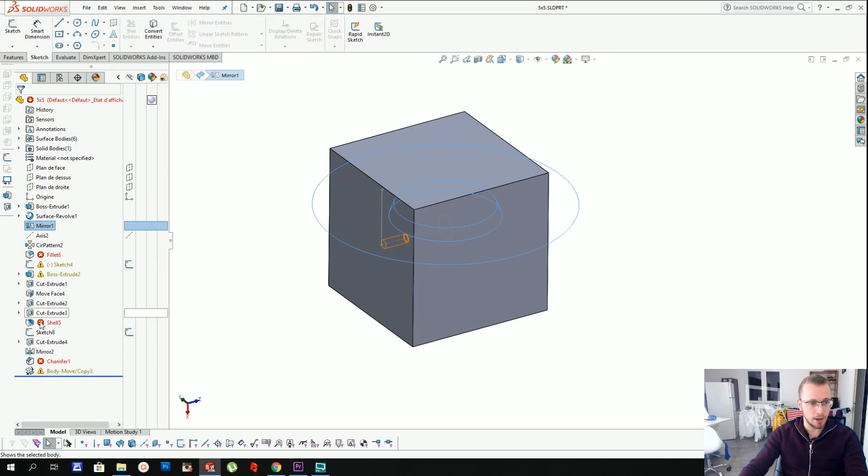Alright, so let's remove all those functions right there. I just need to keep the surface revolve function because that is how I split my solid. You'll notice that here I've got these two surfaces to cut the 3x3 that I showed in the previous video. I'm going to remove one of those, and I won't be needing the rest of the functions. I will keep the axis though, because I use that one to multiply the faces around the cube, and I'm going to do that on the 5x5 as well.

So let's go inside the sketch of the 3x3. Now you'll notice something. Here is a basic 3x3 design. Now, in order to make a 5x5 design, I'm going to need to use VMech, just to make it more stable. Plus, it's a good thing because I'm going to show you how VMech works. So on a 3x3, you get this hook towards the inside. On a 3x3 with a V mechanism, you'll notice how there's first a hook towards the outside of the center, and then it hooks back inwards.

So essentially, I'm going to need to add another circle around it, which is also for construction, by the way. I didn't say that in the previous video, but if you want an entity to not be used like this one in the surface revolve, you're going to need to make it for construction. So yeah, for some reason I can't drag this. Oh yeah, I fixed it. I put a fixing relation, so that means that I couldn't move it.

Now, what I do generally is put 2 millimeters between two circles. You can use the smart dimension to click on both circles, and then give it 2 millimeters between two shells or two layers of mechanism. The diameter of 44 right here, we're not going to be using that anymore. Instead, we're going to make another circle that's tangent to the face right there. So by clicking on the line and the circle, we're going to add a tangent relation, and that way my circle is fully defined. When something is fully defined, it's going to be black.

So again, for construction, and now I'm going to put a 2 millimeter distance between the top of the puzzle and the second layer of mechanism, I guess. Now, this little line here that's linking our mechanism to the outside, we're going to remove it because it's more of a constraint right now.

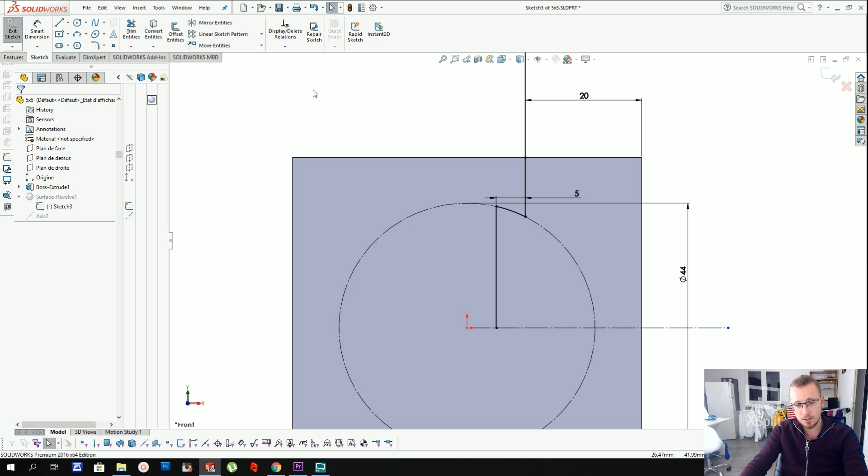And first, we're going to use this edge length, 60. Now we need to do 60 divided by 5, because it's a 5x5, times 2, because you put 2 layers here. And now we're going to go towards the inside, but we're going to stop here, and we're going to do a VMech. That means I'm going to put a hook towards the outside, not the inside this time. So again, using the arc, just like my previous video.

And then I'm going to link the outside to the inside, and I'm going to make that line go through the origin. So here I click on the line, click on the origin, and press coincident. That's just so I have a conical mech.

It could be anything, it could be vertical, it doesn't change much, but when you make it go through the origin, you have approximately the same thickness on the outside as on the inside. So for example, a corner stalk isn't going to be smaller towards the outside and huge near the mechanism, or the opposite. It's just going to be a straight stalk that goes straight towards the inside, and it's going to be of a relatively constant thickness, which is what we're looking for.

So for the V mechanism, again, we're going to use about 3 to 5 millimeters. I'm going to put 4. Last time I put 3, but this is a 5x5, so I want a little bit more mechanism just to make sure the parts are really stable in there.

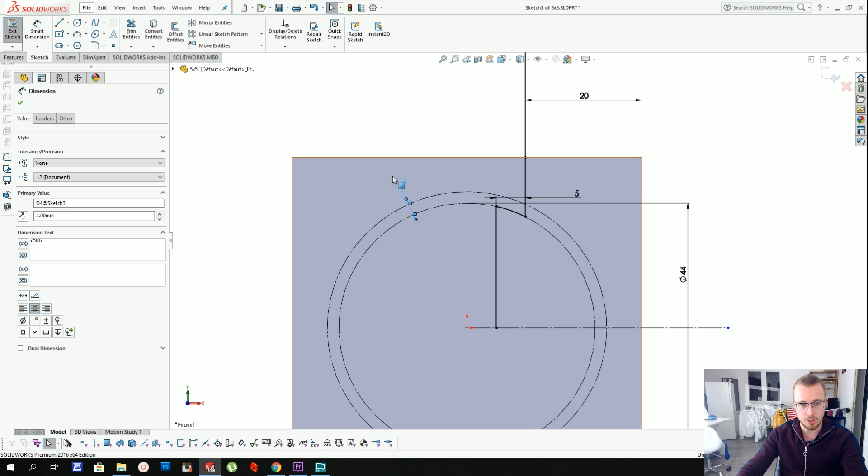And then I'm going to add a dimension here, and let's say I'm going to put it at 3 millimeters, which leaves us with about 4.5 millimeters for the screw, and that's just the radius of the screw because it's going to be symmetrical. So essentially you still have 9 millimeters to fit the screw, which is great because an M3 screw, even the head, goes through that shaft. So that's perfect. So we're going to leave it at that.

This is the first portion. This is the first layer, like the 3x3 layer. This is the layer that's closest to the center. So technically this is like a 3x3 that is completely disproportional because you're going to have a thin layer and 2 larger outer layers. Let me just show you what I mean by that. Mirror and mirror that body. Okay, so here's your 3x3 with a small inner layer. Now let's go back in the sketch.

Something that is interesting. Now here, putting a line that goes all the way to the axis isn't necessary in the sense that it creates big parts. I'm going to keep it now and show you later why it's not necessary. But okay, now we need to add the 5x5 layer. So we need to add an extra layer. Now that is very simple. It's much simpler than you think, for those who don't know how to design puzzles.

Now we're going to do 60 divided by 5 because that is the width of a layer. And then we're going to go inwards towards the inside of the puzzle. Now there's something that's just a nice tip for you guys to have on a 3x3. If I put the mechanism further than this line, then the edges would be cut off because you're essentially cutting through the center of the edge.

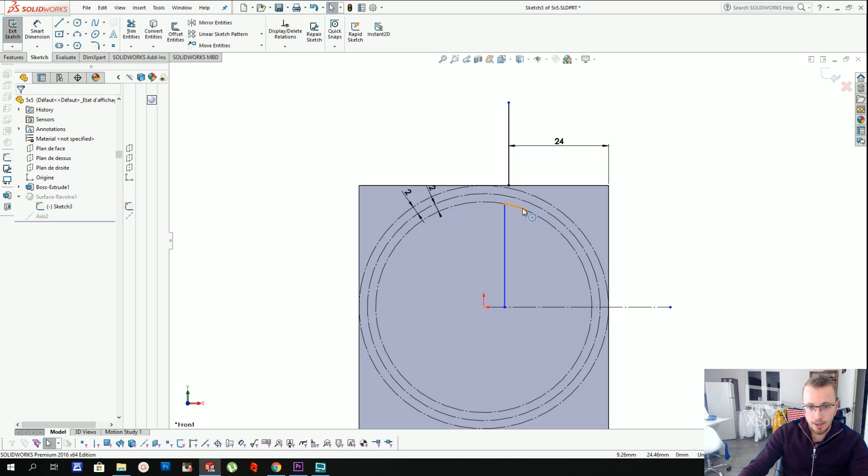This line goes straight through the edge, and if I had one cutting plane going all the way down here, well, the symmetrical cutting plane, the one here on that side, is going to cut the edge off of the puzzle, which is not what we're looking for. Let me just show you here. If I do a mirror of that surface, here you see that the edge is cut off.

Now, if I don't go all the way here and do a symmetry again around this line, then as you can see, the edge will have the mechanism portion right there. If I go all the way here, it's going to cut the edge off. Now the thing is, with a corner, it's even stricter.

Here, in theory, you have an angle of 90 minus... So okay, 90 minus 54.7356 103.17246. I know that one by heart because I always design puzzles. I just have to recite it in my head in French. So it's about 35.26, and you need to make sure.

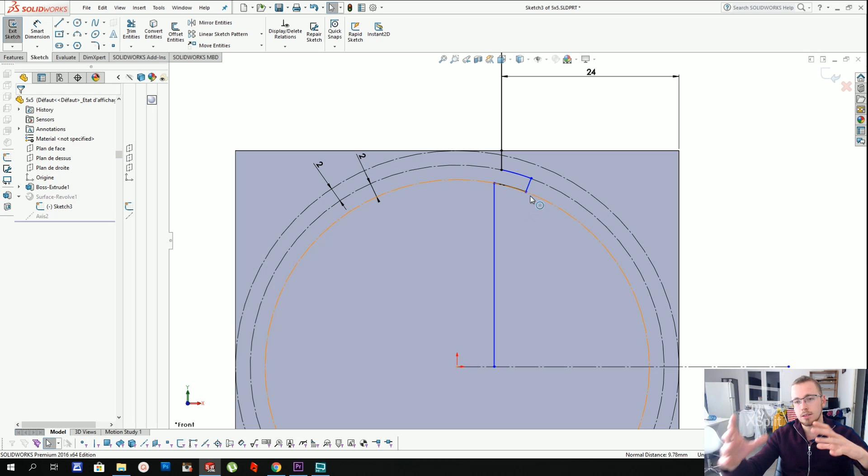Actually, I think I made a mistake. It wasn't 90 minus 54, etc. It was actually just 54, etc. So 54.73... 366. Oh, I put one extra number. It doesn't matter. So this is the angle you're looking for, 54.74. And you need to make sure that this line does not cross this line. Otherwise, the corner is going to be cut off.

So let's bring it towards the center. Notice how when I make a line and click on that point and then go here, it's going to automatically show me a dotted yellow line. Well, that line makes it so that your line right here goes already through the center, so it's already pre-constrained. There's already that relation between the line and the part that I usually do myself.

Now, once that is done, we're actually not going to make this point here fuse to that circle, because that means that we're not going to be able to fit the mechanism in. We're going to need to create a new layer of mechanism underneath the VMech. Again, 2 millimeters between the two circles is just fine.

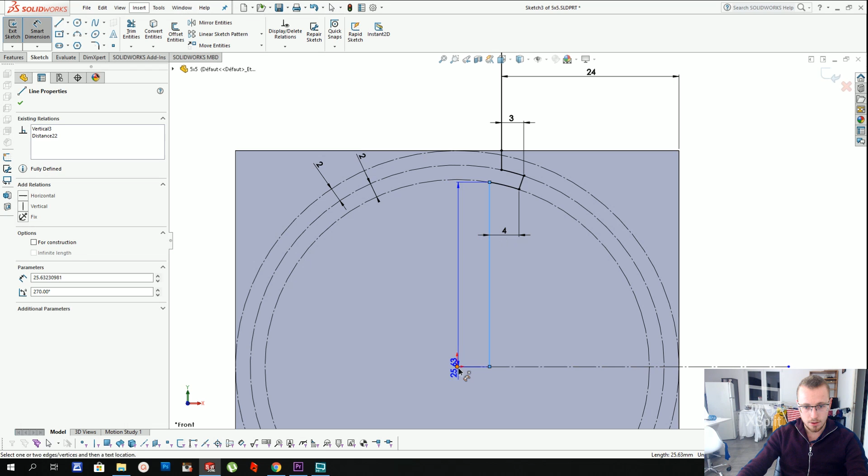I'm a bit faster than my computer right now. It's having trouble following, even though I have like a GTX 1070. I don't even know why. Anyways, so let me just think. Okay, yeah.

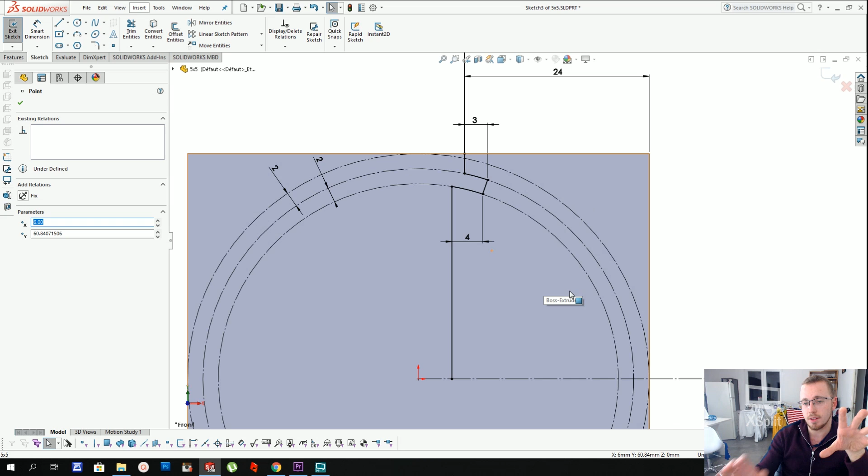So what I'm going to do is I'm going to reduce the size of this segment to 1 millimeter, and here I'm not going to make this line go through the center. Instead, I'm going to make it go a little bit like that. That way the corner stalk, which is the space between this line and this line, is slightly thicker. So now that's done, I can just create a mechanism, so just an arc, which is going to link that line to this line.

And dimension that, let's say I want a corner stalk thickness of 4 millimeters, so I just put like 2, and 2 will be fine. This is essentially half of the corner stalk. Well, it's not exactly half. Let's just put 2.5, because it's like a triangle, and the 2.5 you're seeing is the distance between the center of the corner stalk and the cutting plane. So technically this is going to be a thickness of about, I don't know, like 4 millimeters or something. That's approximate. And now this line, by the way, I'm not going to use that one. It's for construction as well.

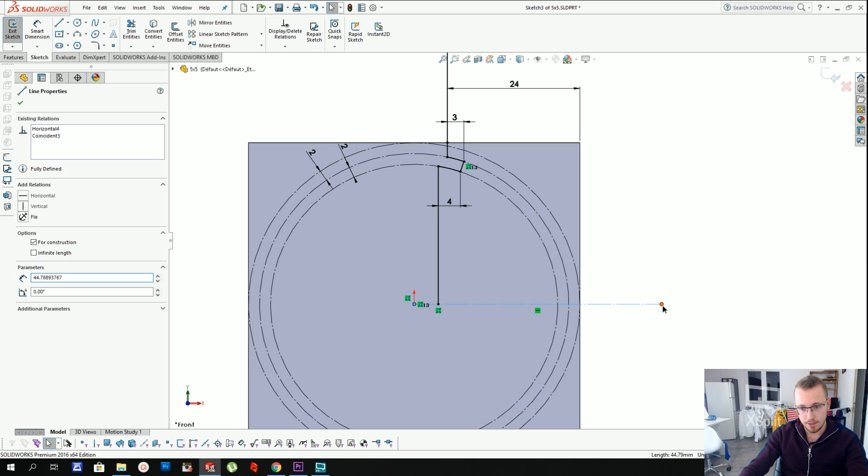So here you've created another line. So here you've got your 3x3 going all the way here, and here you've got an extra cut going all the way here. And now if you notice, this little part that you see here is going to be an inner layer of the 5x5, and you see the hook that goes inwards, and for the outer layer you have another hook going inwards, and that's going to be like your 3x3 section, so the outer layer of the 5x5.

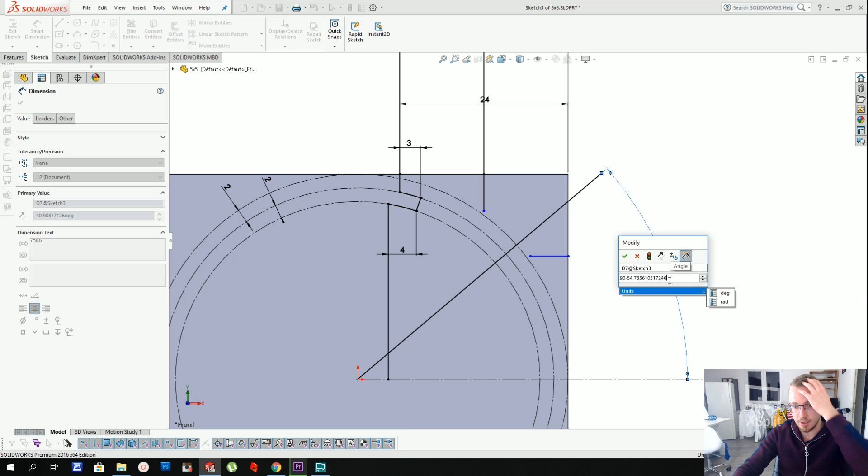So now if we revolve this around this axis, you'll notice I have these two surfaces. I'm going to make the body transparent, just like in the last video, and you see this is my cutting plane. You see the two surfaces are obviously revolutions, because we want the puzzle to turn. Now we're going to mirror those, so I still have my mirror function from before. I'm going to mirror both surfaces, and now I've got this.

And once that's done, I'm going to use the axis from the last video, and I'm going to create a circular pattern of all those cutting planes, and I'm going to copy them threefold around the axis. And there we go. Now that that's done, you'll notice I've got my 5x5 mechanism, and just the thing I was talking about, the corner stalk, you can see here, like if you can reach the inside of the puzzle, that means your corner is still in place.

Now, the thing is, I explained earlier that the closer you get to that line, the smaller the corner stalk is, because if you go further than that line, you're essentially cutting it off. I'm going to show you, if I get really close to that line, you'll notice how my corner stalk is going to be extremely thin. This is the space for the corner stalk. So that's why I was saying that. So you need to make sure you've got a little bit of leeway there.

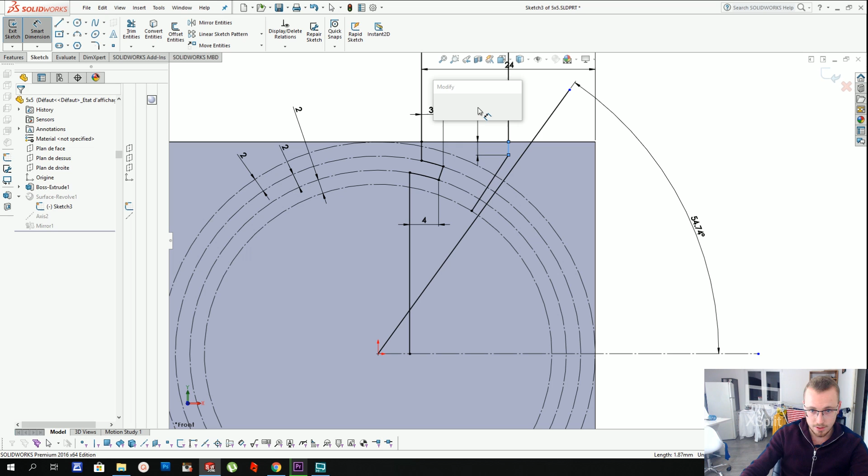So yeah, again, at least, I guess, like 2 millimeters is fine. It would be enough. So make sure between the axis and the point you've got 2 millimeters. On some puzzles, I tend to go down all the way to 1. That's when there are a lot of parts and the puzzle is complex. I'll probably need to do that in one of my future videos, but for now I'm going to stick to simple stuff.

So now, it looks complicated from here, but don't worry, it's not that complicated once you understand the 2D aspects of how a puzzle works. So essentially the cut view of the surface. So if I do like a section view, you're gonna see my solid right there, and this is how you're gonna cut it. I can't let my click go because otherwise you're not going to see the lines,

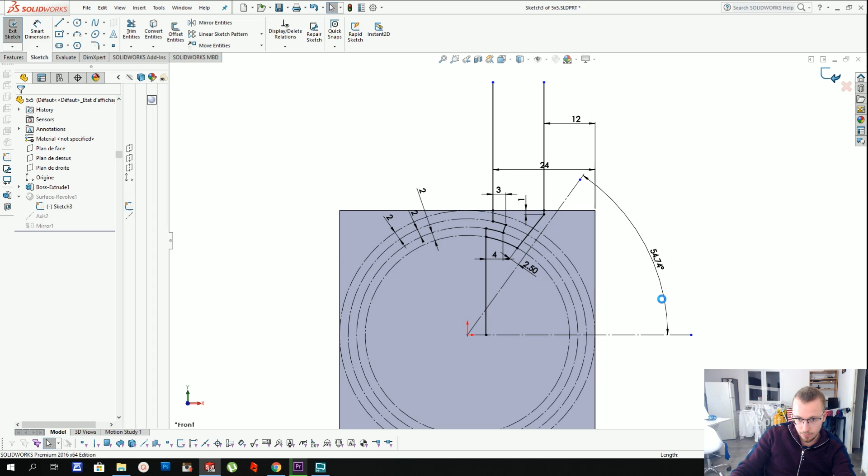but here you've got the VMAC right where my cursor is, and here you've got the first layer, and here you got the outer layer, and you can recognize the mechanism. This is like a VMAC edge right there, and you can recognize it if you've already opened a 5x5. You'll see that this is how it works. So it's actually quite easy. You just have to add one layer right there, as I showed in the sketch.

So now we're going to cut it open. That's the fun part. So I'm going to split this solid with all the surfaces I've created, like that. And now I'm going to press cut bodies. Now I've got a tiny software that was created by a member of the Twisty Puzzles forum, and it's somewhere in there. It's called SW Checkbox Helper. So I'm going to use that. It basically checks all the boxes for me.

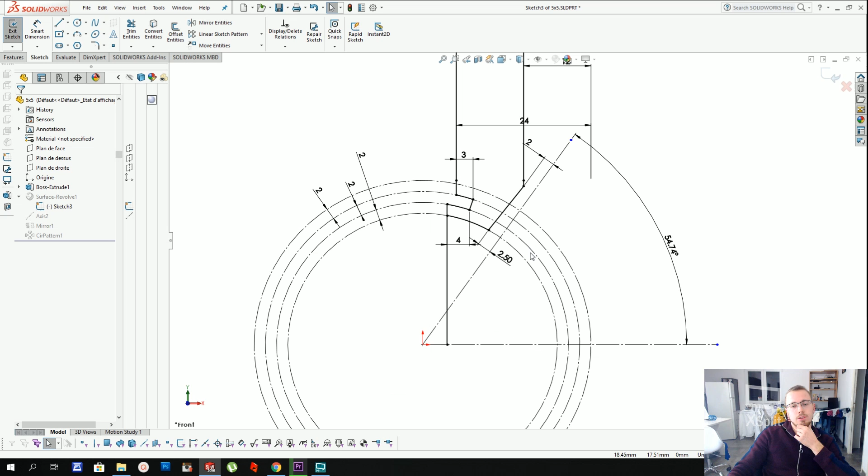Right now I have 99 boxes. That's the number of parts in a 5x5. So I'm going to press 99 and click go. So it's going to check all my boxes for me, and oh, that is such a relief. I hate clicking on those boxes. Once when I started Twisty Puzzle Design, I had to click on 1,670 boxes by hand, just by myself. So that was a pretty long process, and I am so glad that somebody created SW Checkbox Helper.

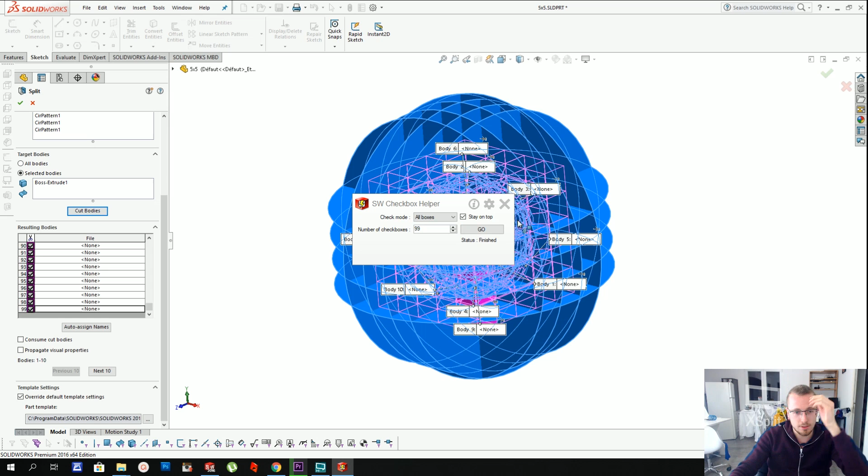Anyways, same as before, we're going to isolate all the unique pieces. Now you'll notice that on the 5x5 there are, okay, no, it would be more on 7x7, but if a piece is symmetrical, let's say imagine this one and this one were two different unique pieces that were symmetrical, well, you would only need one of them, because then you can do a symmetry using the mirror function. So we're going to keep one of each unique piece, like that.

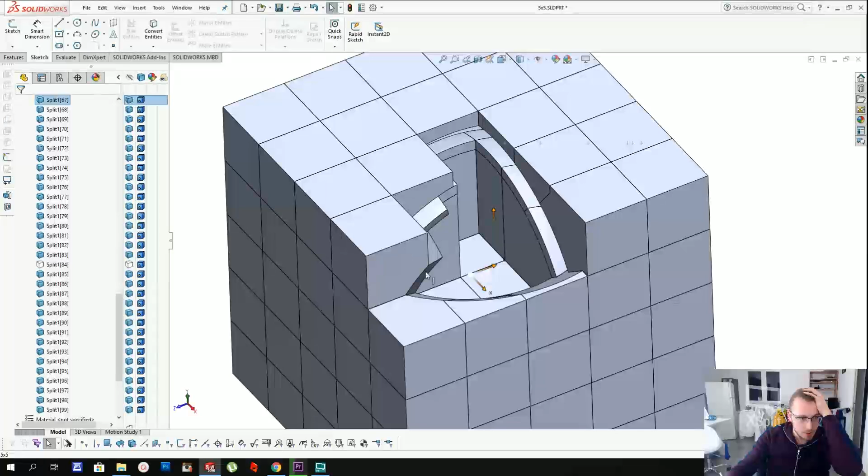And as you can see, we've got the same problem as yesterday, where the centers are so long, and they don't need to be that long, and we need space for the core. You see, this center stalk is extremely long. Now this is where I was saying you could improve on the design. So here, instead of going all the way down to the center with that line, what we're going to do is go all the way to another circle, which is also going to be 2 millimeters apart from the previous circle.

And all right, let me just do that, because I'm speaking faster than I can design because my computer is slow. I think it's slow because I'm exporting the video right now, but yeah, I guess I can still explain anyways.

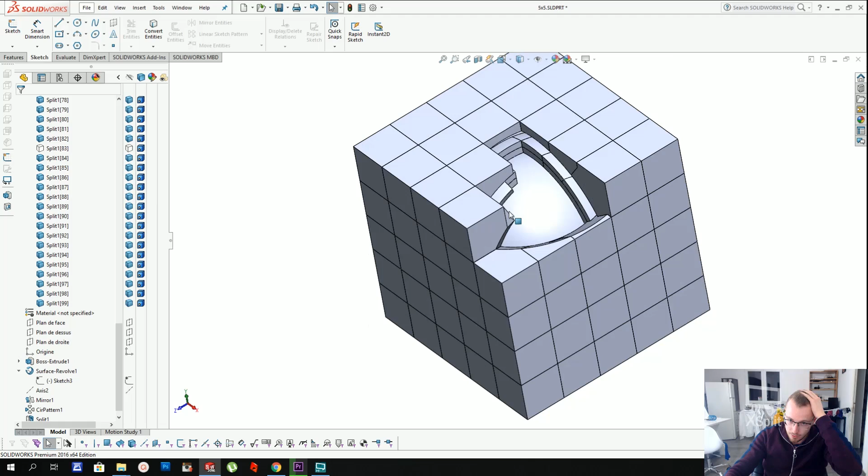And now that I've created this line, again, previously it was all the way down to the axis, so we need to link it to the axis, but we can do this through that circle right there by creating a new arc. So right now what we're doing is essentially making a spherical core. And I'm going to show you that right now. I'm not sure the split function is going to follow. Normally it should. Yep.

So now your centers look like this. It's as if they were positioned on a ball core. This is what your center looks like. It's like a section of a ball. Well, the opposite of a ball. It's just like concave. And here is your spherical core. And that's what it looks like. So it's actually a very nice method.

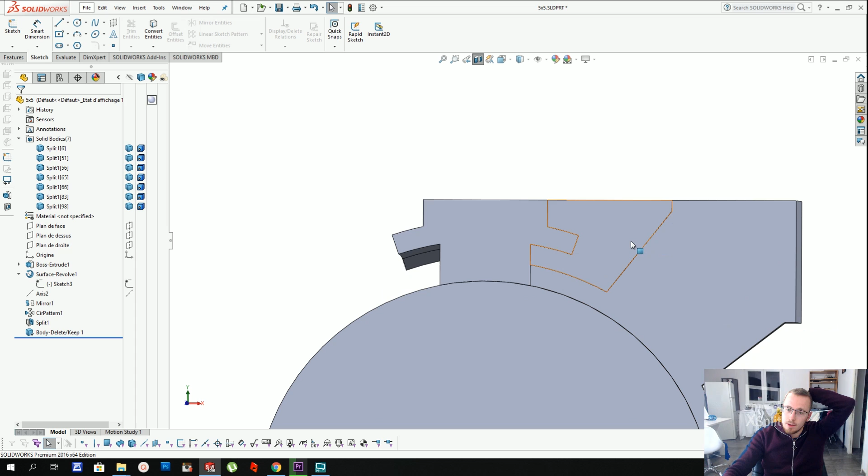For some reason, this center is fused to the core, which means that my split function had a small bug. So I'm going to fix that one real quick. That means I just need to check a few boxes that were unchecked by the failure of the part recognition in the split function by SolidWorks. So let's go down there and see which one.

Oh, there it is. Number 86. And number 97. So there were only a few problems, just a small bug. So that happens. And in this case, we're also going to hide the core. And now I've hidden all the unique pieces.

So now I'm going to select them in my tree, like that. And I'm going to press delete. And now I can delete or keep bodies. I'm going to press keep bodies. And I'm going to delete them. Delete the rest. And now if I show all the bodies,

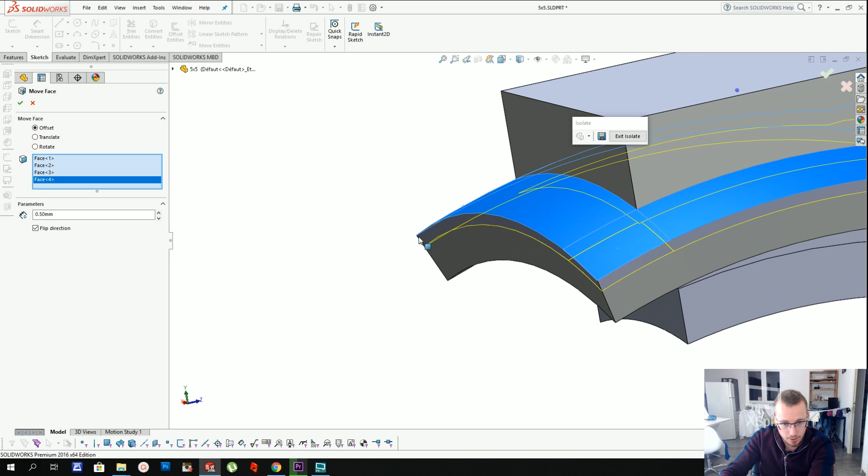you can see that the only bodies left are my center, my 3x3 edge, 3x3 corner, the wing piece between the edge and the corner, the central corner, and the central edge. So this is all you have in a 5x5. Now we're gonna hide the parts that don't need tolerancing. Well, I'm gonna undo that.

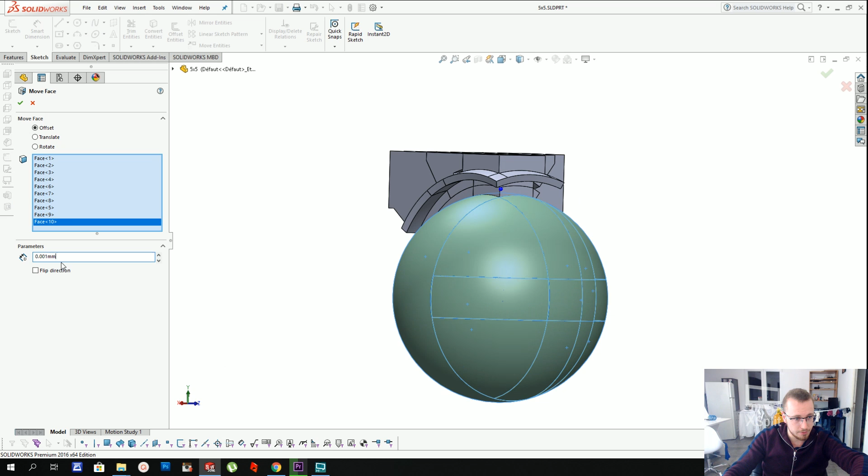The only parts that need tolerancing are the parts where you have an interface here that would be squeezed between two sides of the same part. So here, for example, the blue lines that I just highlighted, this one and this one, these are essentially this part of the center that's being squished by this piece, and you need to avoid that at all costs.

Now, what's important is that this surface here is the one that keeps that part in place. And this surface doesn't really need to be in contact because this part is held in by the surface underneath. So you actually need to put a 0.5 millimeter tolerance on the top of V mechanisms.

I always use 0.5. Technically, you could use any number between 0 and 2 because it's 2 millimeters thick. You can't go higher than 2. But you can essentially put as much tolerance as you want. It just needs to be enough for it to be smooth. But since you don't need contact, it could be like a 3 millimeter tolerance if it was a big design.

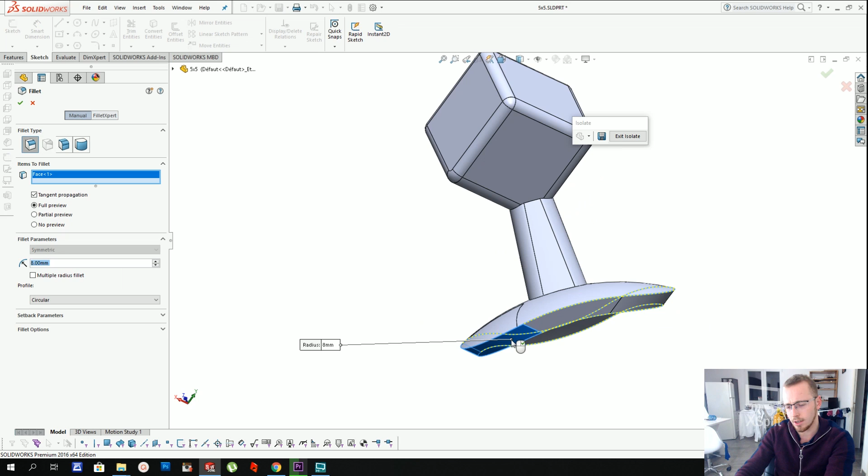But anyways, on the 33 by 33, for example, I happen to use over 2 millimeters of tolerances on one of the VMechs, the one at the bottom, the 3 by 3 VMech. So it's a lot, and it was just enough. So on any puzzle like this one, you could use 0.5, and that's more than enough.

So we're going to start with the tolerances by clicking Face Move, and I'm selecting the top face of my VMech, like that. Flip direction, and I'm going to remove 0.5 millimeters. As you can see here, this is the current thickness, and this is the new thickness. Now I'm going to exit the isolate function.

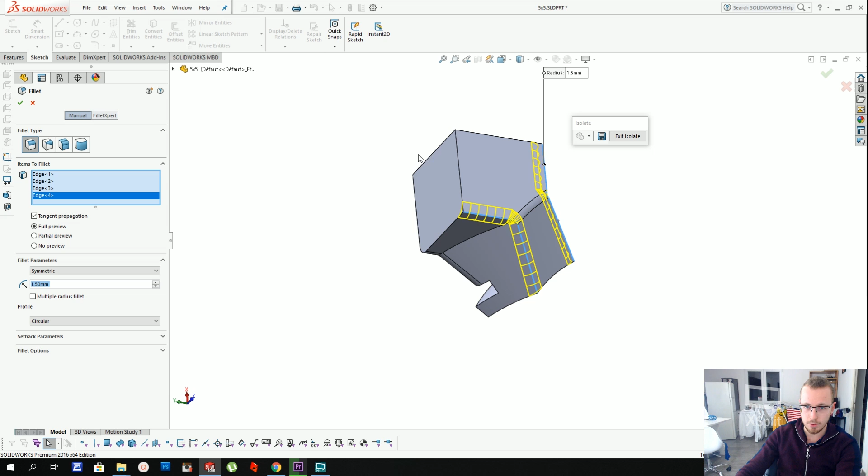Here I've got another part with VMech. You see VMech on the two sides, so I'm going to select the two faces, press face move, and offset those by 0.5 as well. And then I've got this edge here, and I'm going to click the two VMech faces and offset those.

Now, I don't know if you guys remember from the last video, but I said there was a small issue with SolidWorks. If we look at this piece, we have an interface between two edges here, one that's on a bottom surface and one that's on a top surface. SolidWorks has a little bit of trouble recognizing that, so we're going to do a move face, and move that face by almost nothing, 0.001 millimeters.

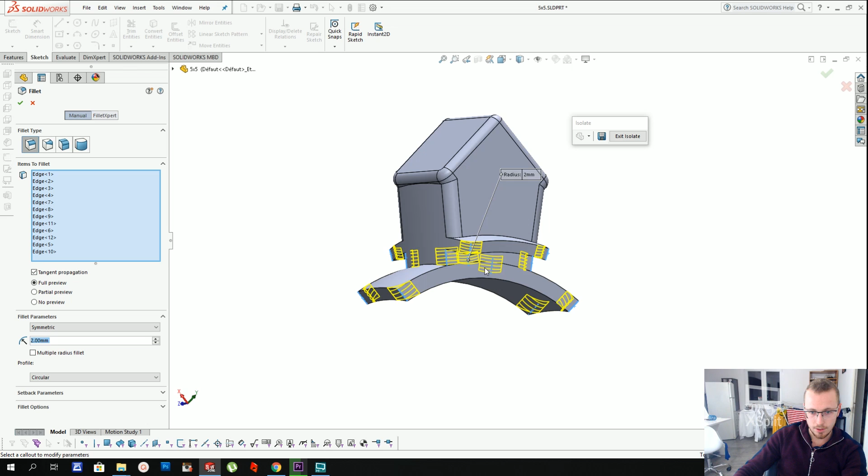Sorry if my voice is shaking. It's really cold down here in my house. I don't know why. I think it's like 18 degrees. And I didn't use my microwavable slippers this time, so yeah, it's getting cold.

Anyways, let's see what's left. Well, I've used the move face on these three parts, so now they're offset. As you can see, here's my tolerance right there. That's where there's no material anymore. And there is one last one that you need to absolutely not forget, and that is the core.

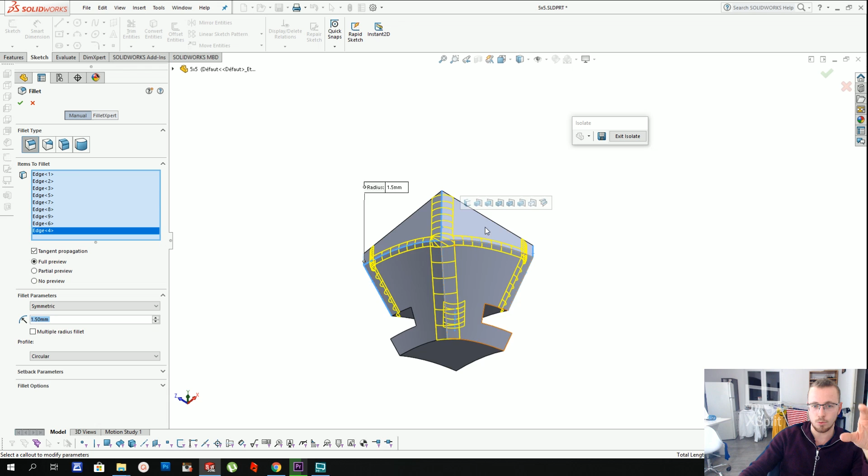Because if the core is like this, those parts won't be adjustable because they'll be stuck between the center and the core, and therefore, if you want to make it tighter, you're just going to squeeze them against the core, which is absolutely critical. So now I'm going to click on all the faces of the core, and do that same tolerancing function, which is the move face function.

And again, I'm going to flip the direction, and now I've got the spherical core that's been pulled back 0.5 on the outside. So now I have a little bit of leeway between the center and the core.

All right, so now I need to do fillets. And well, I've already done that in the previous video. And you know what, I am gonna do that step, but technically once I've done this, you can do the rest yourself.

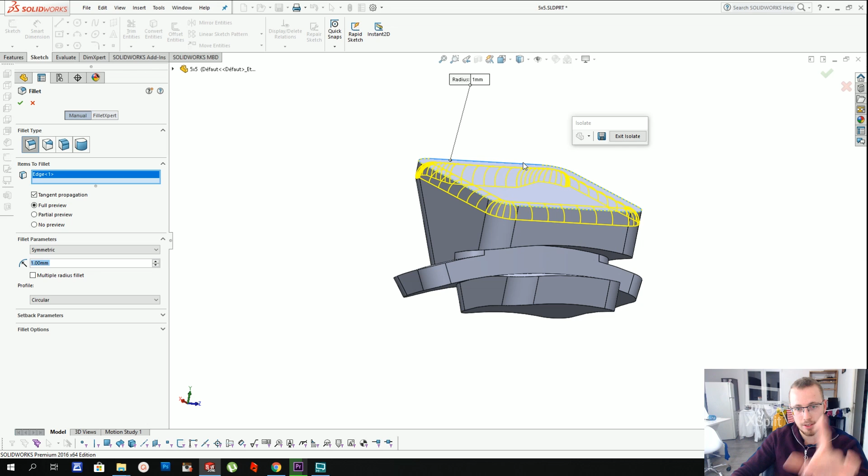Everything that I explained in the previous video is enough to complete this puzzle as is. So technically right now, I'm done with the explanation, because you should know how to do this if you've seen the previous video. If you want to know how to do the rest, watch the previous video.

When it comes to me, I'm gonna try to speed design this 5x5 and end the design just for fun, because you know, why not? So let's. I am gonna talk about what I'm doing though, that way it stays interesting.

So let's do this. I'm gonna fillet those functional edges, but I am gonna increase the fillet size, but not too much, otherwise the corner stock is going to be too thin, so I need to make sure it's not too thin. I've put 1.5 millimeters radius.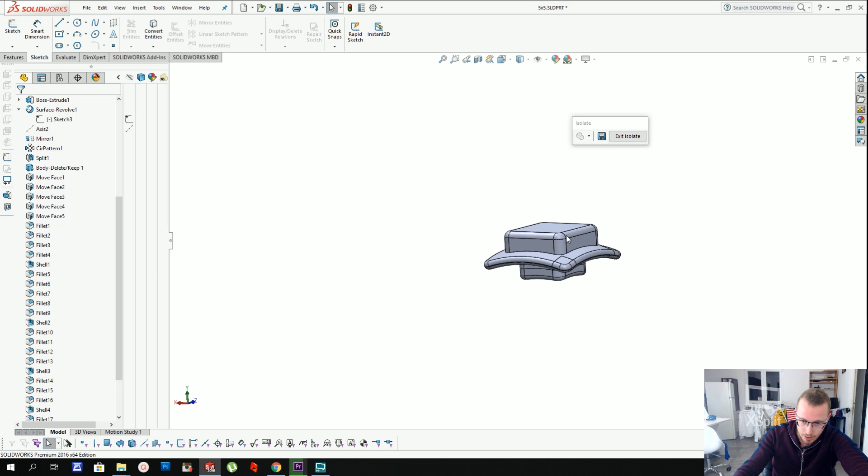Now I'm going to use 1 millimeter on the outside because I think it looks good. And now there is one thing that I can do on this piece that I couldn't do on the other puzzle. I can make huge fillets on the inner 3x3 because the piece itself is gigantic. So I'm going to put 8 millimeter fillets.

That's huge, but it's gonna make better quarter turns, I guess, corner cuts, sorry. And then now I can use 0.7 millimeter fillets for the top and bottom surfaces so that they don't catch with upper layers of the mechanism. And now the corner is done, so I'm gonna hollow that out just like the previous one, at 0.8.

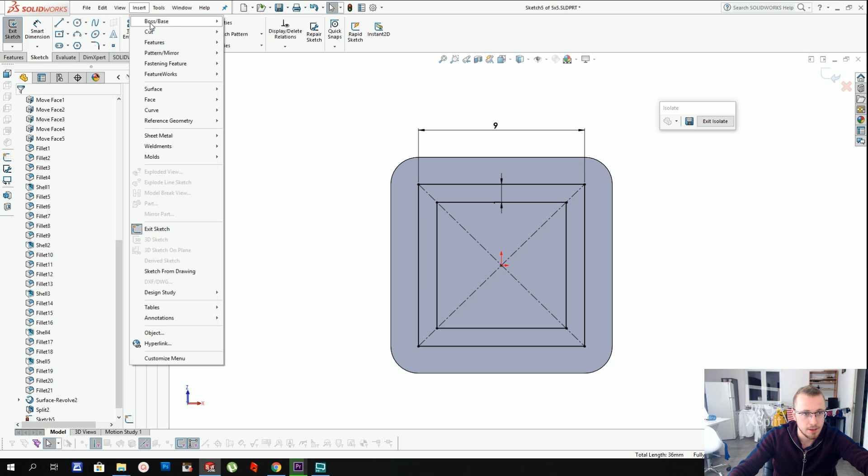All right, now that that's done, I can move on to the next piece. Now, for those who want to know how to make a hole inside the core, for finalizing the core, I'm going to show you that later on.

Do stay tuned for the core design, because the core is very important. There is something that you can do to make sure that there are no stacking problems, because sometimes with part stackers, the core has a little bit of a problem, which is the fact that it's hollow. And when it's hollow, some parts can actually be stacked inside the core without you knowing, and therefore when you receive the puzzle, there are parts that are missing, and that is a big problem. So just don't forget to check out the core design, because that is extremely important.

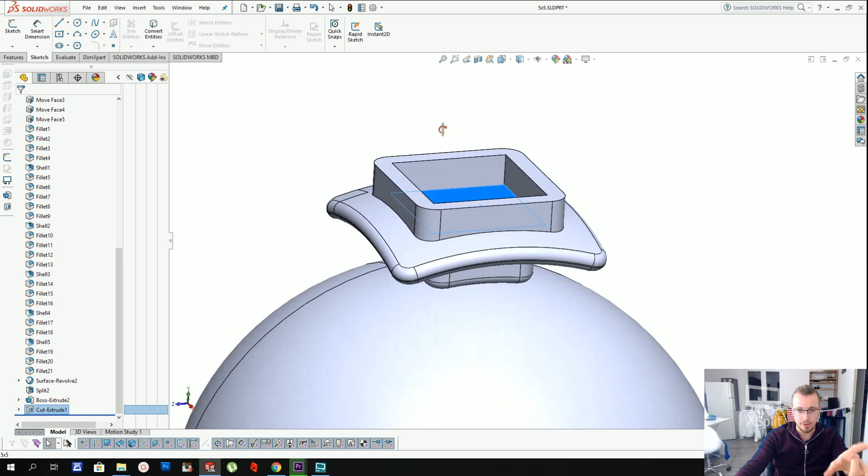All right, I'm going to continue designing that part in the meantime. So right now I'm doing the wing piece between, I don't know why I call it that, but I've always called it that. So no, okay, I clicked on a function that automatically selected certain edges, and that is not what I wanted. It almost selected all the edges of the model.

So yeah, now I've done my 1.5 millimeter fillets. I need to do the outside, the appearance, which is 1 millimeter. And this is what it looks like.

Here I've got my corner cut fillets. These are important because this is where the piece is gonna interact with other pieces of different layers, and I need to make sure this is big enough. 1.5 is enough, it's still gonna be good.

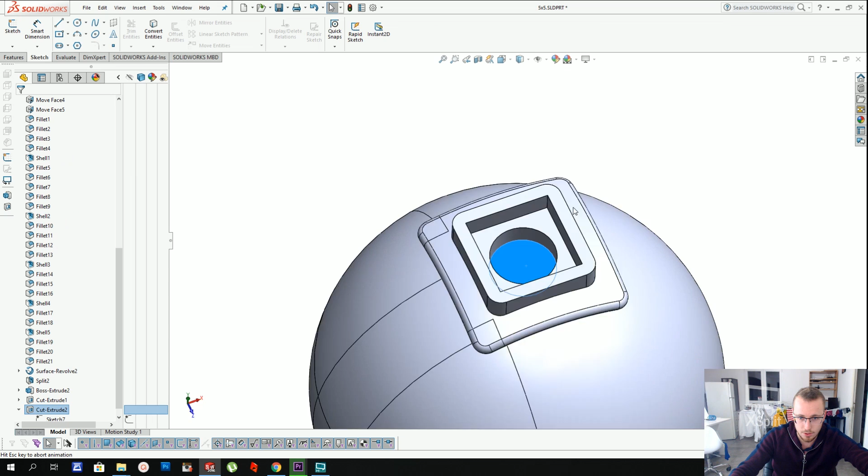I'm actually doing a design that I know I won't print, even though it's not exactly useful right now, but whatever, it's fun to design this with you guys. All right, so let's shell this at 0.8 millimeters. Now it's hollow, and I can quit the isolate function.

Now you'll notice I've done the corner and the wing part. I can do the bigger edge. I am going to show you a small function, an extra function here. It's just a tip. I might have a few tips and tricks as I go. It's not guaranteed because I don't really think of them in advance. It's just that when I reach that point, I'm just going to realize that I can do things better.

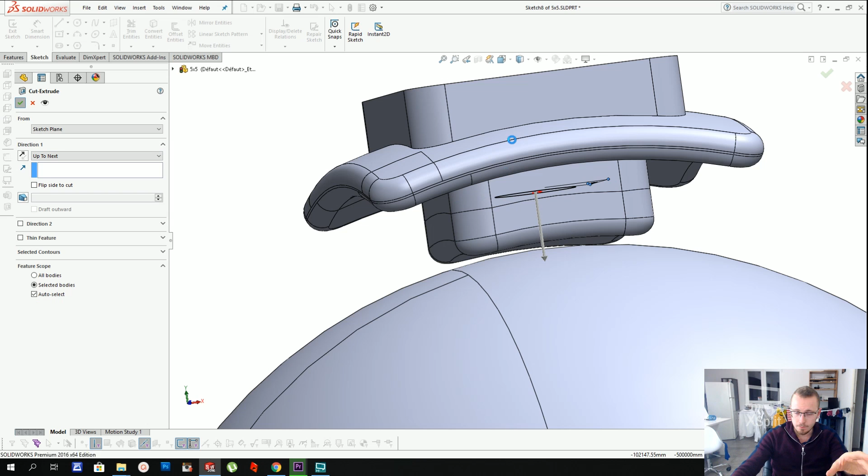So 1 millimeter again. Okay, now I've got some more corner cutting fillets to do. So those are the lateral edges, those that are going to interact with the rest of the puzzle. I'm going to put 2 millimeters here. It just sounds like a good idea to put bigger fillets right there.

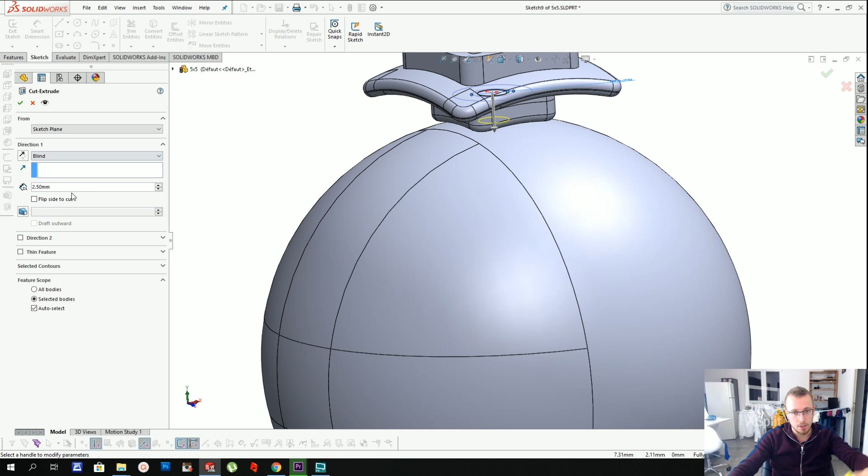And once that is done, well, you know what? I can show you that function I was talking about. Let's remove those 4 fillets. So you see here, like if I click on one edge, here it's going to offer me multiple functions here.

If I select this one, it's going to automatically select the pink edge. If I select this one, it's going to select way too many, so I can click on that, and it just selected this edge automatically. I can do it again here, see, this edge was selected automatically. Anyways, that's just an extra method that's quite useful.

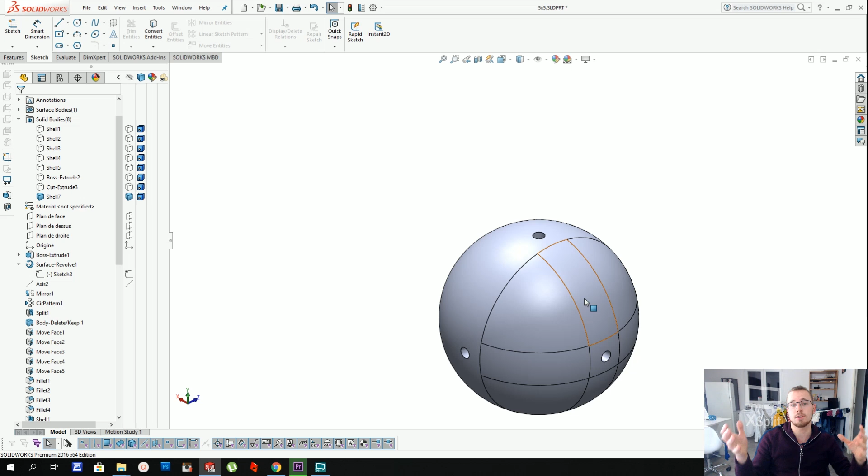Here, if I select this edge, for example, all that's left are 0.7 millimeter edges, so I can take all the convex edges, and it's going to select everything. Now it's going to finish filleting my piece if I put 0.7 millimeters. I just selected one edge and it finished the whole part for me. It's simplified design, which is really cool, because if I had to click on every single edge, every single design, it would be a lot of work. So I'm glad there are these tiny SolidWorks shortcuts for me. It's really useful, and it's great.

It's a really good method to design, because that way you gain time, which is really important. Now, 1.5 millimeter fillets, I'm doing the same as before. I'm creating those, well, not just appearance, but corner cutting fillets right now.

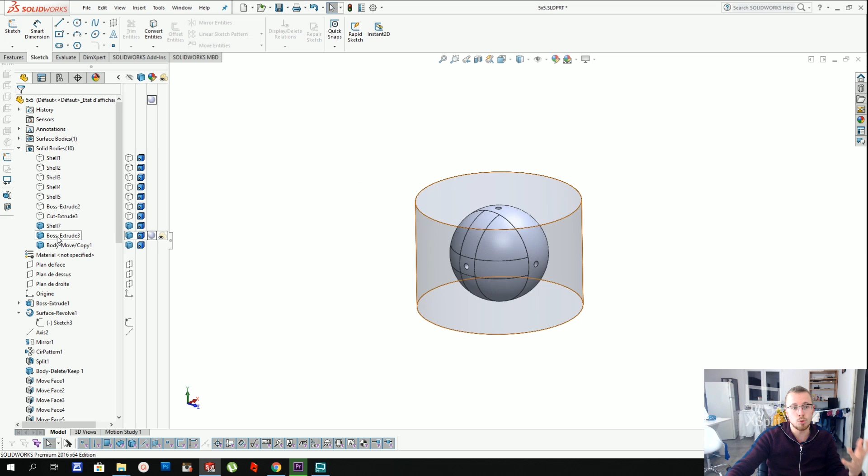Something that's very important as well, I keep saying that: when there's an interface of 4 edges, you can't just select 3 and fillet those, it's not going to work. So always select them all. Even if it looks like it's not working, like when you click on that edge and it doesn't render anymore, it doesn't mean it's not going to work later on. So don't hesitate to check, once you've selected everything you want to select, check if it works.

Now I've selected all my corner cutting fillets, put them at 1.5. I'm going to put another appearance fillet on the top face at 1 millimeter like I always do, and finally add 0.7 millimeter fillets on the inside, right there. Again, I can select the function that selects all convex edges, and it's going to do the work for me, and I just have to press enter or click OK.

Now I can do the hollowing of that part. Shell that thing at 0.8.

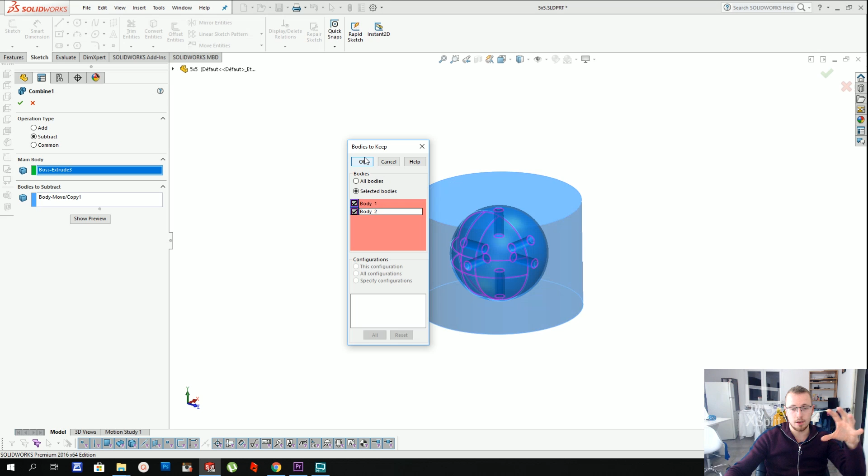Alright, I think I'm going to be finished before the 3x3 video finishes rendering, which is quite cool. That way I can just prepare that video as well and edit both at the same time. That's going to be fun.

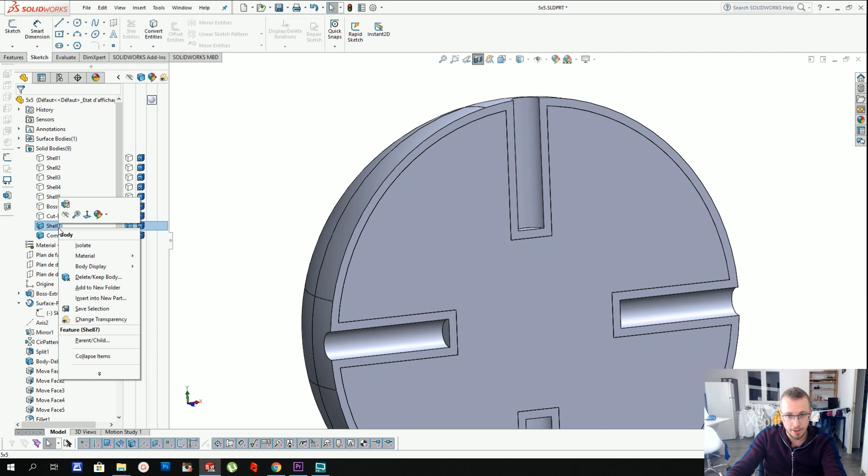By the way, in one of my previous videos, I had a small issue where I was stickering a puzzle and the sequence wasn't accelerated when it should have been. The thing is, I've given a bit of those videos to edit to my roommate. She's a student, and I'm essentially helping her pay rent by giving her a bit of editing work. But it doesn't seem to be working out, so I'm going to edit the videos myself again from now on, because I don't want any mistakes. I want good videos and high-quality videos for you guys. So yeah, even though I tend to be lenient, it wasn't the first mistake, and there were quite a few mistakes made on my videos, so I'm going to take over again.

Anyways, let's click on that and make an appearance fillet. Now, something that's quite peculiar here is the fillet was too big, and that created a sort of oozing right there, as you can see. It's barely visible, so I could leave it, but I still don't want oozing on that 5x5, so instead of leaving the oozing, I'm going to reduce the appearance fillets down to 0.7.

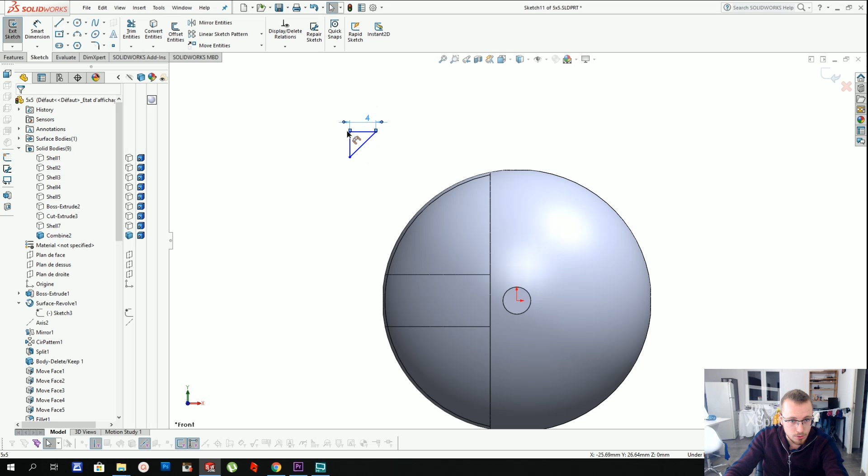That means I can do all my fillets like that. I'm selecting all my convex edges, 46 edges in total, so it's going to select them by itself, and press enter, and now the part is filleted, so that's perfect. Now I add a shell function, press that, select the part, press enter, and it's going to shell itself, so that's perfect. SolidWorks is a really good software for that.

You barely have any work. It has a lot of useful functions that can save you a lot of time, which is why I really like using it. Alright, let's do some corner cutting fillets again, 1.5 everywhere, boom, right there.

Here I'm going to select connected to start virtual loop. That's going to select the 2 last corners, and here if I select this edge, it's going to select all 4, and that is perfect. I just have to press enter, add a 1 millimeter fillet for the appearance on the top face.

I should have waited though that the video was finished editing before starting this video, because it is lagging quite a lot compared to what I usually have. I'm usually much faster at this than I am right now.

Alright, so now we've finished the centerpiece. The core doesn't need to be rounded, considering it's a spherical core. Now we're gonna prepare the screws.

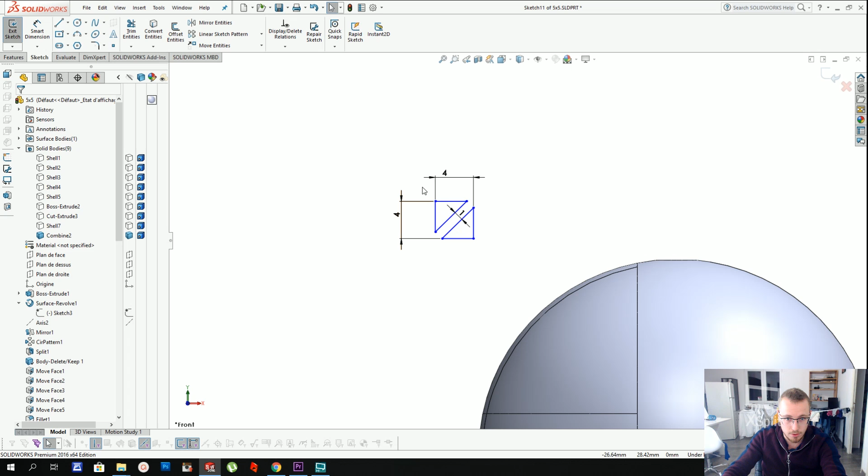First, we need to make a center cap, just like last time. I'm gonna take a plane that goes straight through the center, create an axis going right there, and create a plane to cut that cap off. Now surface revolve to create that cutting surface, which I'm gonna split the center with using the features split function. I'll select that center and cut it using the surface revolve. It's going to be split into two parts. Check them, click OK, and now we're good.

Now I'm going to isolate that cap right there.

I should do a speed designing challenge, like try to speed design the 3x3 and see how little time it takes me. I'm curious just to see the result, like do an average of 5 or something. I think it would be fun.

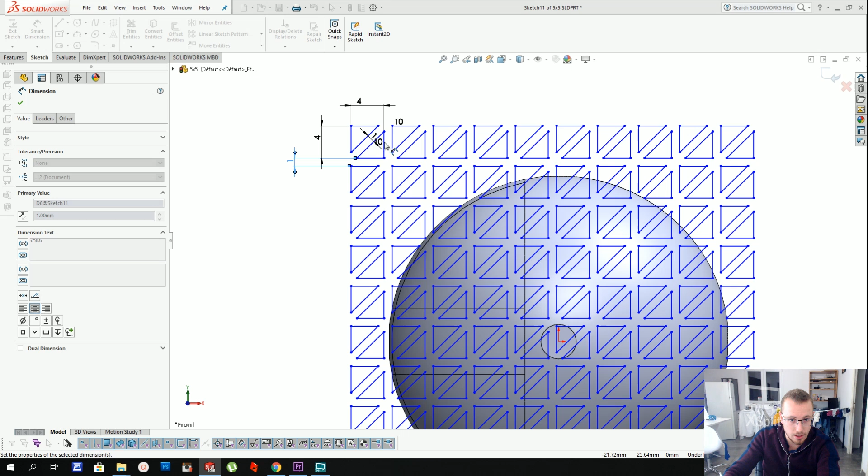Anyways, let's do 10 millimeters here, 10 millimeters there. I'm just doing an equal relation, meaning the two lines are the same length. Let's take it down to 9.5 or 9. 9 is good, I don't want it too close to the edge, otherwise the centerpiece is going to be too thin. Now that that's done, I can select those 4 lines and offset them with the offset entities function, by 1 millimeter, like this, perfect. And extrude that to make a cap, 2 millimeter cap. All right, now we're good.

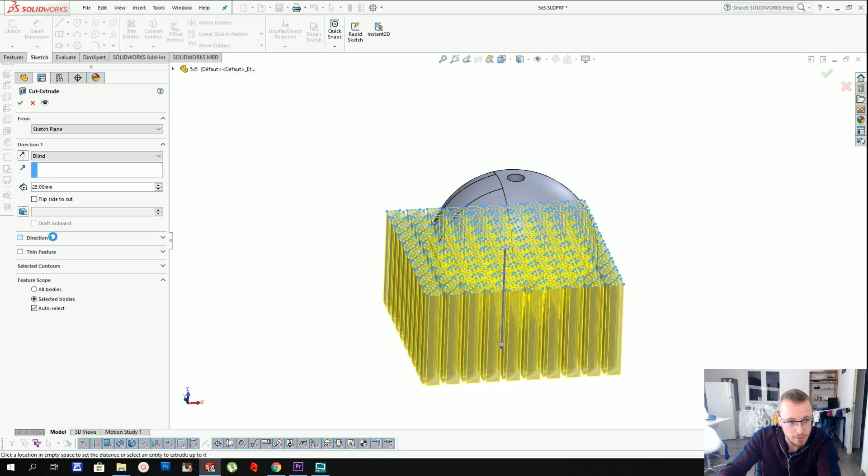Now I have an idea: we're gonna create the reverse cap, the female cap in the center, and I'll show you a method. I just created the sketch on that plane because it's essentially the same plane as where the reverse cap is. If I select these edges here and do an offset directly from these edges, offset it by 0.1 millimeters, I won't have to add the tolerances later on. My sketch is already there, so I just have to remove that sketch from the center, and that's good.

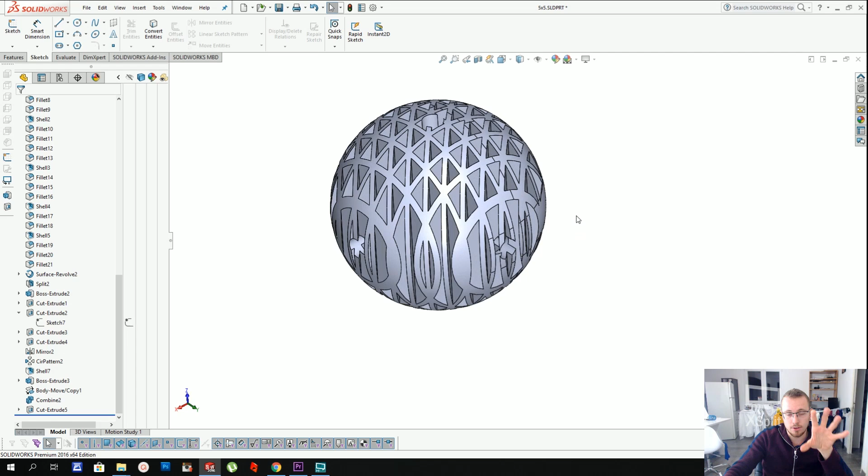So now that I've done the cap, I can hide the cap, and I've got my sketch here, which is offset by 0.1, meaning I already have the tolerances. So when I'm going to cut the female cap in there, I'm just gonna have to remove 2.5 millimeters of that square I just created that is slightly offset, and the tolerances are already done, so that's perfect. Now there's only a few things left, and that's cutting up the hole for the screw head.

The screw head hole is going to be 8 millimeters wide, which is just fine, and now I'm going to extrude that by about 2 millimeters. Although here, I don't know if you can see, but the screw head is way too close to the outside, which means the part is going to be very thin. That's something I don't want.

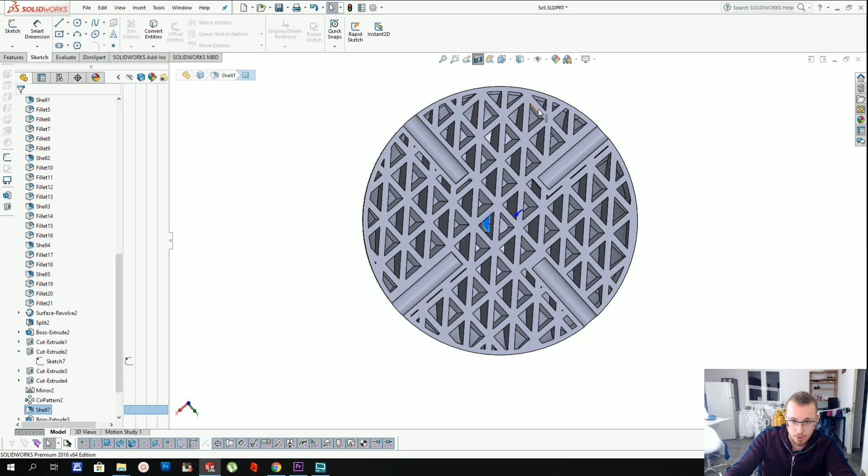So I'm going to press OK just so the function is done, but I'm going to go back into the sketch and edit it to make it slightly smaller. As I said, the screw head of an M3 screw is technically 7 millimeters, and I can put 7. I put 8 just to have a little bit of leeway, but 7 is fine, and I'm just going to leave 7 because I don't want it to be too thin on the side.

If I select this face, this surface, sorry, and look at the cross section here, we're going to see that this is not too thin right here. We could technically even look through the part. As you can see, this is a relatively sturdy geometry because it's quite thick. So that's just what we need.

Now we need to do the hole for the screw itself, not just the head. Just like last time, it's going to be 3.5 millimeters so that the diameter of 3 goes straight through it, but not large enough for the screw head to go through, obviously.

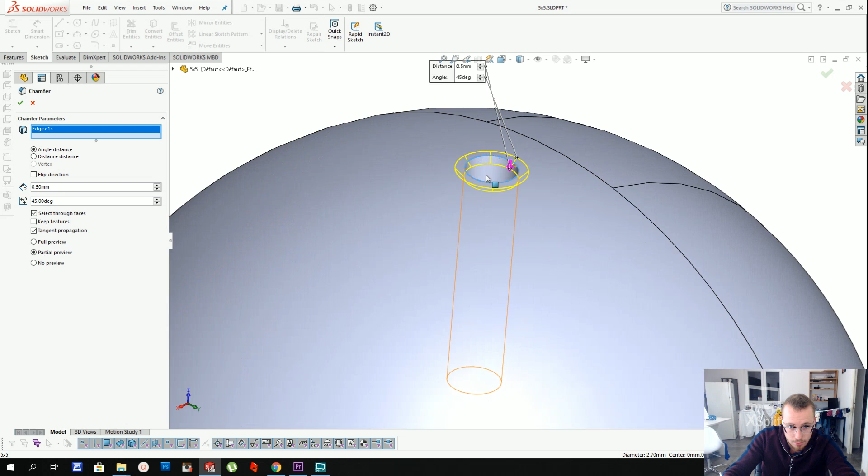And we're going to do up to next. So in the direction, instead of digging by like 10 millimeters or 2.5, we're going to do up to next, and that means it's going to stop cutting through the part when it reaches the next surface, which is technically the end of the centerpiece. If I did blind, which means giving it a value, there would be a chance for it to cut through the core, and I want to take care of the core separately. So I'm going to do up to next, and now I'm going to do a new sketch in the center.

Well, no, first I'm going to hollow out the center if I can. Usually centers are a bit of a problem to hollow. I think there's going to be a problem. Yeah, see, it's bugging right now, so it's not going to work. So I'm just going to leave this part out. I'm going to leave it full and not hollow.

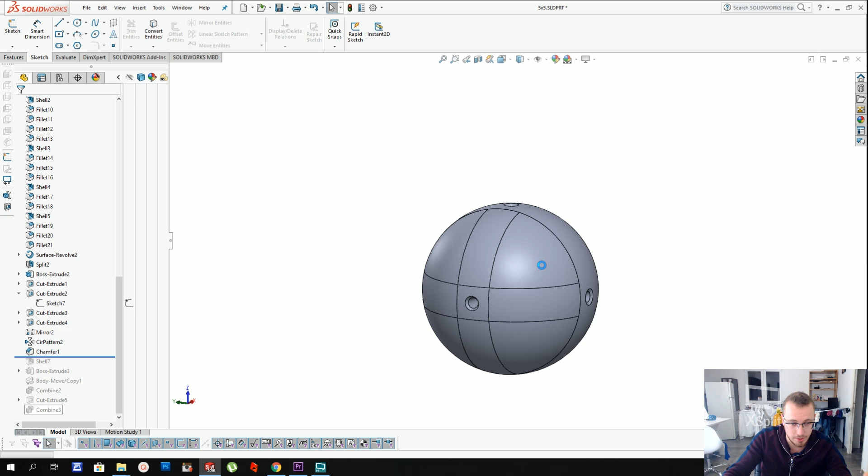So now I'm creating a sketch on that surface because that's the only flat surface I know that is perpendicular to the direction of the screw. I can't do a sketch on the core this time because the core is spherical, and you can't just draw a 2D drawing on a 3D surface. And I'm going to make it 2.7 millimeters wide, just like last time. And now I'm going to extrude this all the way down into the core this time. So I'm going to use a blind direction, and I'm going to give it a distance of 15 millimeters. That should do the trick.

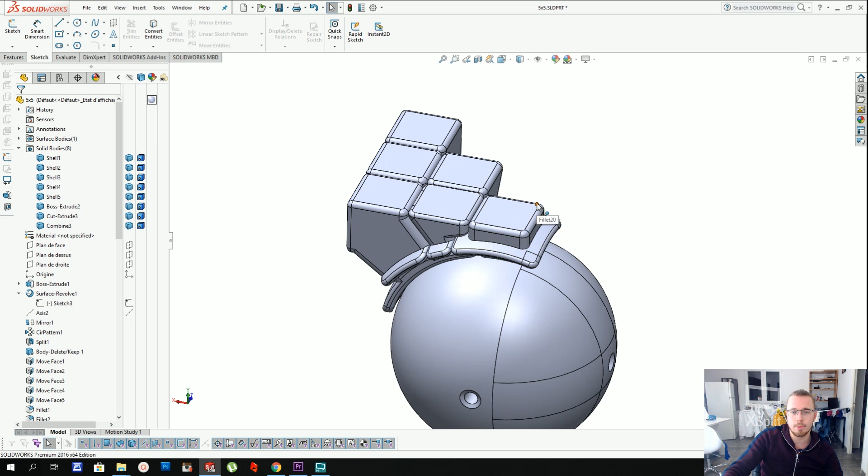Yep, we're good. And just like in the previous design, I'm first going to make a symmetry of that hole that I created, so that it's also on the other side. So I'm going to mirror a feature, sorry. Click on the feature and mirror that feature so that you have a hole on the bottom. And I'm going to use the original axis that I used in the previous video to revolve that and make 3 copies around that axis of the feature. And that way, I will have a core.

And that's wonderful. Which means now I've got my fully prepared design with all the parts, but I haven't hollowed out the core. So I'm going to hide all those parts, and I'm going to work on the core. That's very important. Yeah, I said important again, but it is extremely important. So I'm going to shell this core.

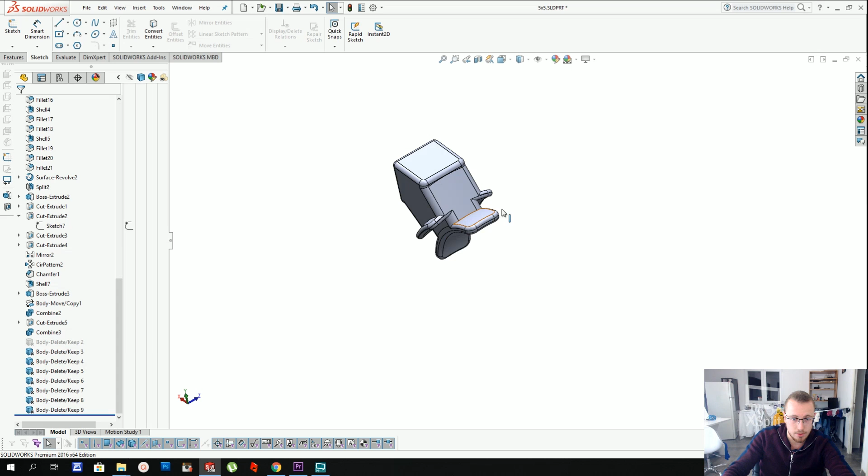But the thing is, as I said earlier in the video, if you saw that section, because you're probably skipping through sections, when you hollow out the core and then you use part stacker to stack parts, sometimes some parts finish inside the core because there's free space, and the software considers it to be free space. And so when you receive the core, you can't get the parts out because they're just hiding inside the core. So there is something that you can do, which is quite cool because it even makes your core sturdier.

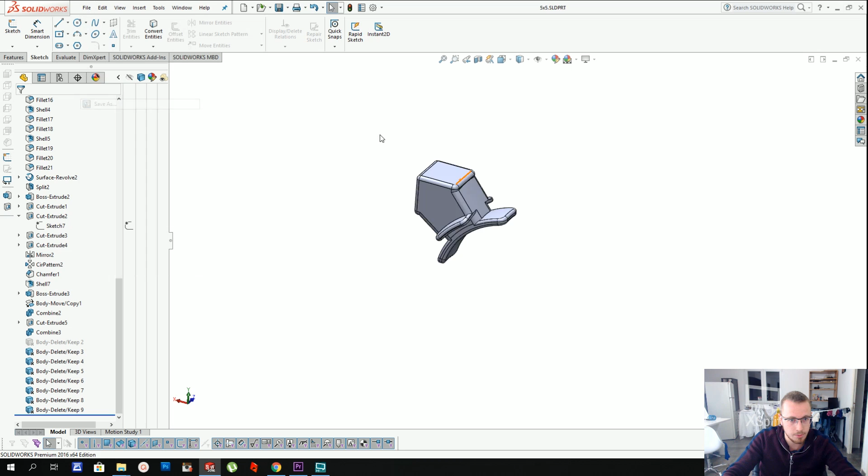And that's great. Now, I've just made my core hollow, and see on the inside, this is what it looks like. And the parts could be stacked inside. Now, you don't want that. So what you're going to do is create a solid that is bigger than that core. Any solid. Here I'm just going to make a cylinder because it's easy to make. And I'm going to make it big, bigger than the core. Let's say 20 millimeters in one direction, no, 25, and 25 in the other direction. Now I don't want to merge it though, because I don't want to have my core transformed into a cylinder. That would be pretty stupid.

And now that that's done, I'm going to hide my cylinder, and I'm going to copy the core. Whoops, not the cylinder. I want the core. I can also select the core here, shell 7. And I'm going to press copy. It's going to say you have no rotation or translation specified. Do you want to proceed? Yes, because I just want to make a single copy that doesn't move. I want it to be there. So now I'm going to hide the original copy. That way I save my core, and I'm going to work using my copy of the core. Now in the features, I'm going to do combine, and then I'm going to do subtract.

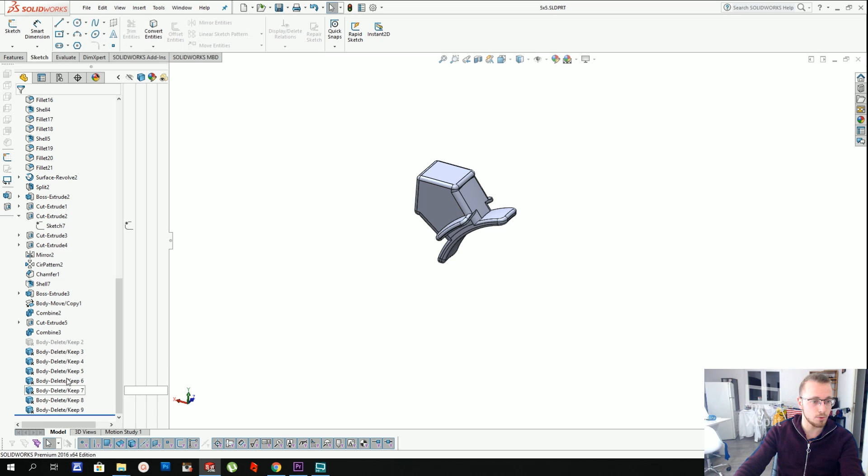I'm going to select my cylinder, which is bigger than the core, and then I'm going to select my core and press OK. It's going to create... Oh wait, it deselected the main body, so I have to select it again. I press OK, and now it's going to say, which bodies do you want to keep? There are 2 bodies, the outside and the inside, because I've just subtracted the core from that body. The only one that I'm interested in right now is the inside. So I press keep the inside, OK.

Now this is what you find inside my core. Let me show you the core. Now this is the core. This body right there is the core. I'm gonna try to select the face. Yeah, the face that you see here is the core, and this is what you see inside the core. So if I hide the core, this is what's left. And that's essentially a negative image of the space you have in the core.

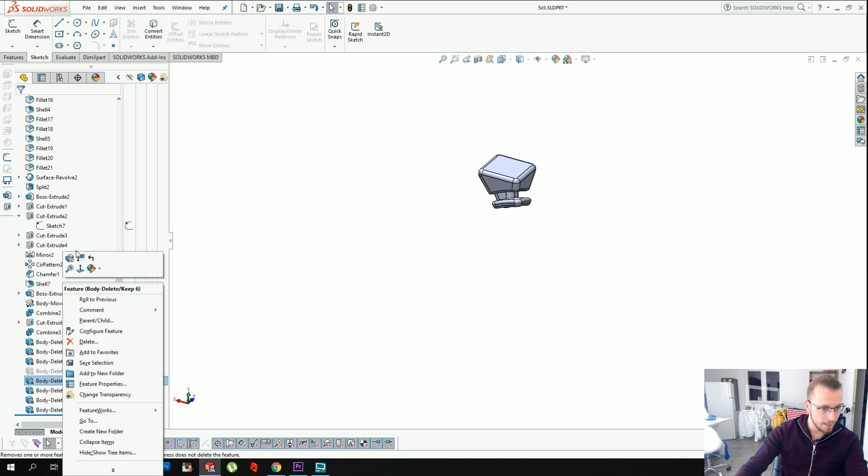So now that I have that negative image, I'm gonna take any plane and go perpendicular to that one, and I'm gonna draw tiny triangles. Now, it's gonna be difficult to explain why. You're gonna understand as soon as you see the result. So I'm gonna do that really quickly. Okay, 4mm triangle right there. 4mm to an edge, it's gonna be an isosceles triangle. So this is the same length as this. And I'm gonna do that again on the opposite side.

And here, I want all these edges to be the same length. And I'm going to do like a 1mm gap between the triangles. This is going to be the thickness of the inside of the core. I'm just going to explain it in 2 seconds. Technically, this is not 4 that I want. I want 4 between this and this. And now that I have that, I want 4 between this and here as well. Okay, so now I have 4mm between this and that, 4mm between these two, and 1mm between these two.

So what I can do is now copy those entities by 5mm in one direction, like this. Make, let's say, 10 copies, and then same in the other direction. And I'm gonna make 10 copies spaced by 5mm. Now, you're probably asking yourself, why 5? Well, that's because here I have 1mm as well as here. So I have a constant thickness in there.

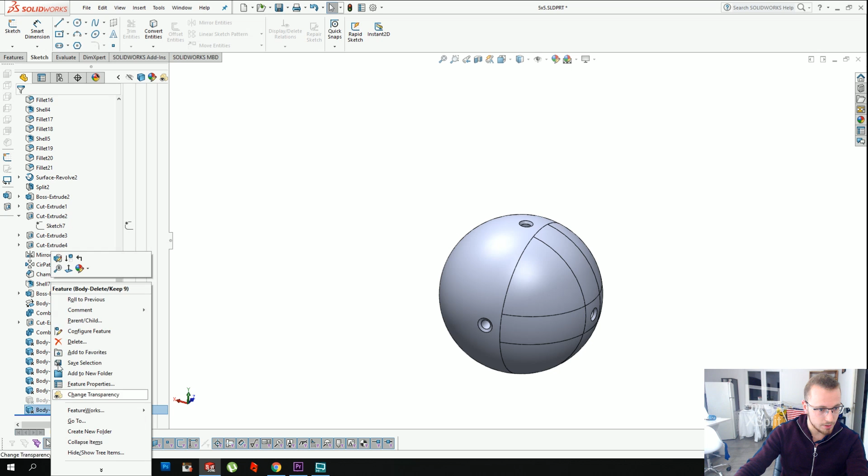My throat is getting kind of dry.

Anyways, I have a constant thickness now. So I have this grid of tiny triangles, and now, leaving the sketch, using that whole sketch, I'm gonna press cut, extrude, and I'm gonna remove all those triangles from the core. Now the reason why I did that is so that the final result looks like this.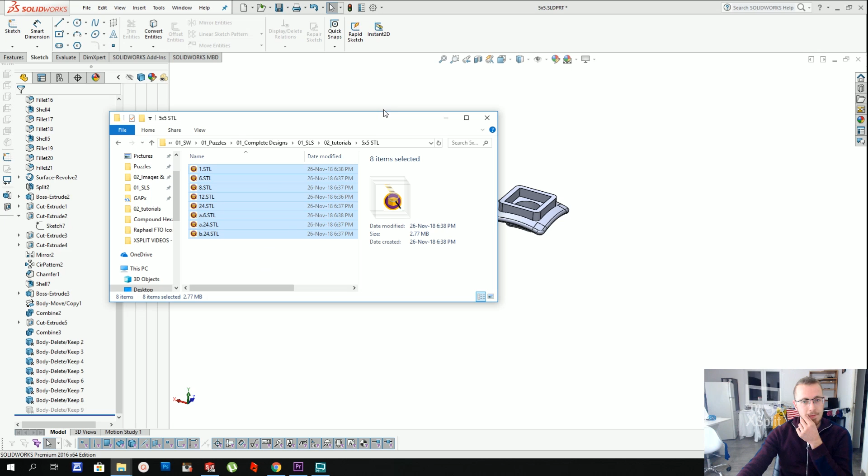I've removed triangular segments from the core, and all you see is the inside of the core with this structure that's going to make it very strong, and it's still going to be hollowed out, but there won't be enough space in those tiny triangles for other parts. So the stacking software is going to understand that your core is filled, and therefore it's not going to try to stack other parts in there.

So now I do combine, and I combine the core that I had with the inside of the core that I created and press OK. And now if we take a look inside what I just created, this is what my core looks like. You've got the regular core holes where you screw the parts in. You've got one here on the inside as well. And you've got that very strong structure here. That's going to make the core indestructible, and the parts are not going to go and hide themselves in there when you stack them, which is what you want to avoid.

And now there's one final thing that I forgot to do. Technically, I should have done the shell after that. Well, you know what? I'm going to roll back to before the shell, and I'm going to do that. So features, chamfer. I forgot to add the chamfers, the 0.5mm chamfers here on the screw holes to make it easier to insert the screws. I'm going to do 0.5 times 3, 0.5 times 60 in that direction. Perfect.

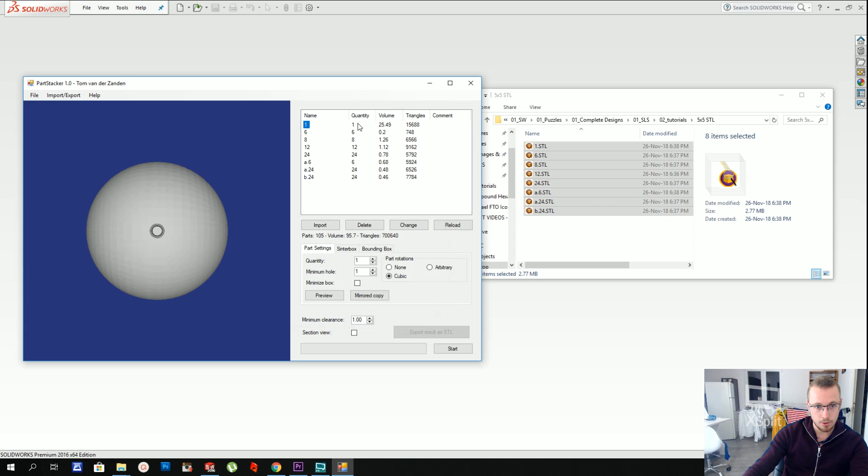Click on all the screw holes. Bam, got them, and now the screws will be easier to insert. And now that that's done, I can just roll forward, and that's going to redo everything that I just undid, but with the chamfer that I created. So that's just an easy way to add a function before another function. It's like editing, but then going backwards and forwards again.

So now we've done that. Every single part is ready to print, and all you need to do is save all the different files as, well, in this case, I do have to admit there's something that I didn't show in the previous video. Last time I stacked the 3x3 parts, I didn't show you how to use Part Stacker, so I'm going to show you that now.

You see here, I've got my individual parts, so I'm going to press Features, Delete, and I'm going to select one and delete it. Then I'm going to select the other one, delete it, and do that for all the bodies. I'm doing this fast. Okay, so here I've deleted all those bodies right there. So I'm going to undo the deletion of that one, and I'm going to save it as an STL file.

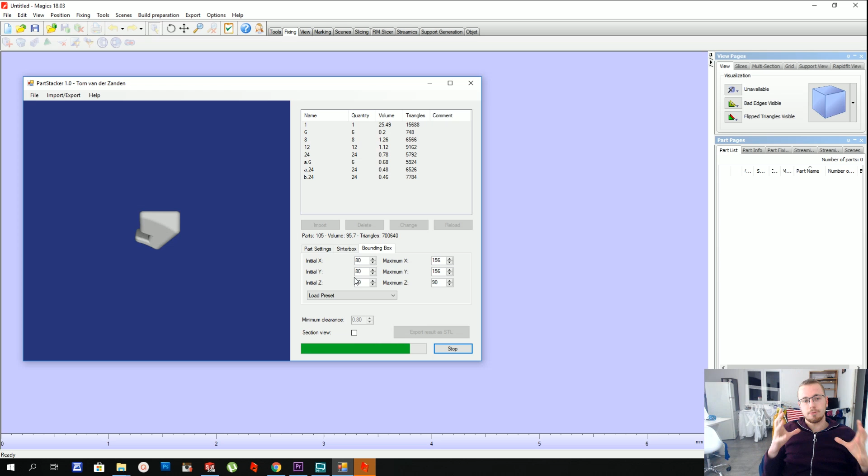The reason why I do this is because I want there to be only one body at a time when I'm saving the document. I'm just going to save it right now as a SolidWorks document. Now Save As, and you go to STL. And now let's create an STL folder for the 5x5. All right, so before you press save, you're going to need to give it a name.

Now this part needs to be copied 12 times because there are 12 3x3 edges in a 5x5. So let's call it 12, because Part Stacker is going to recognize in the name how many parts of each type you will need by looking at how the name ends. In this case, the name ends with 12, so it's going to copy it 12 times. So now I'm going to undelete the second part and save it as 24, because I need 24 copies of that one. Then I have to do this for every single part.

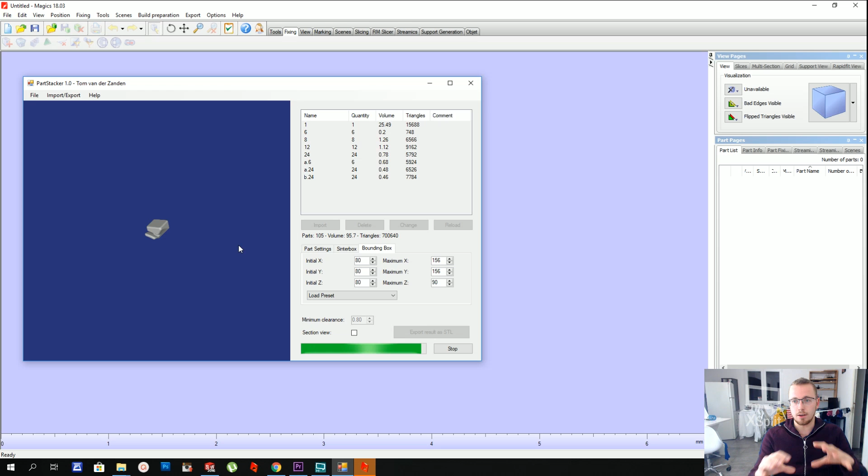The corner needs to be called 8, because obviously there are 8 corners in a cube. And I'm going to explain if you have the same number of parts. Here, this one needs to be copied 24 times, but we already have a file called 24, so we're going to call that A.24. It actually takes into account only the digits after the last dot, so A.24 is going to work. And then you can just do B24, C24, etc. So this is going to be B24. All right, then undo, redo.

Oh, I know why it's not lagging anymore. The video finished exporting, so that's why. Now I can go fast.

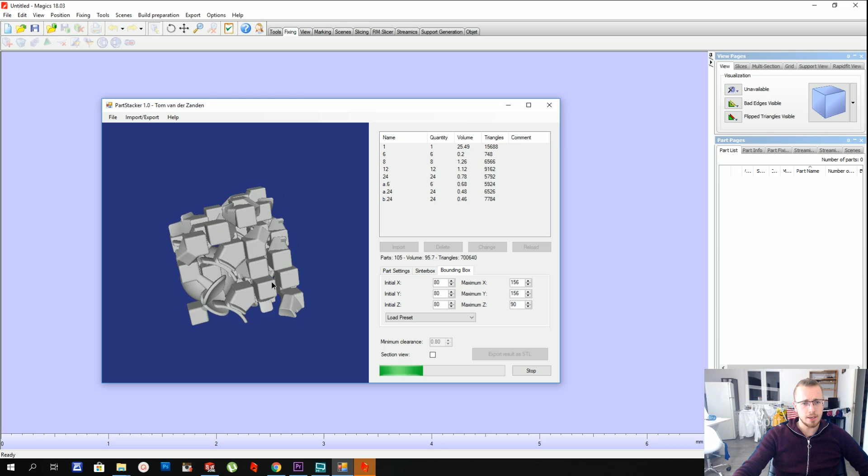Now there's the center cap. It's going to be called 6. Then I'm going to undo the deletion. Okay, this is going to be called 1. All right. Now, the next one is the center, if I'm not mistaken, and this is going to be called A6 because I already have the center cap called 6, and now we're good.

Okay, so I've exported all my files. They are located somewhere in there. Let's go and see. So, complete designs, SLS, nope, not there. Tutorials, 5x5 STL, and here are all my files.

Now, the SolidWorks document, we're not going to need it anymore. I could use it to show you how to make templates, but I want to make a separate video for the sticker template. So I'm going to just save. You know what? I'm going to undo all of that because it looks better when I have all the unique parts. I'm going to save it as that, quit, and leave the design.

Now, all that's left is to stack those parts. So I'm going to show you now how to use Part Stacker. So it's in softwares, logiciel, all right, Part Stacker new. And now I have to import all those parts. Let's copy the destination folder. And as you can see, name 1, quantity 1, name 6, quantity 6, name 24, quantity 24. It actually detected the number of parts of each type that I wanted.

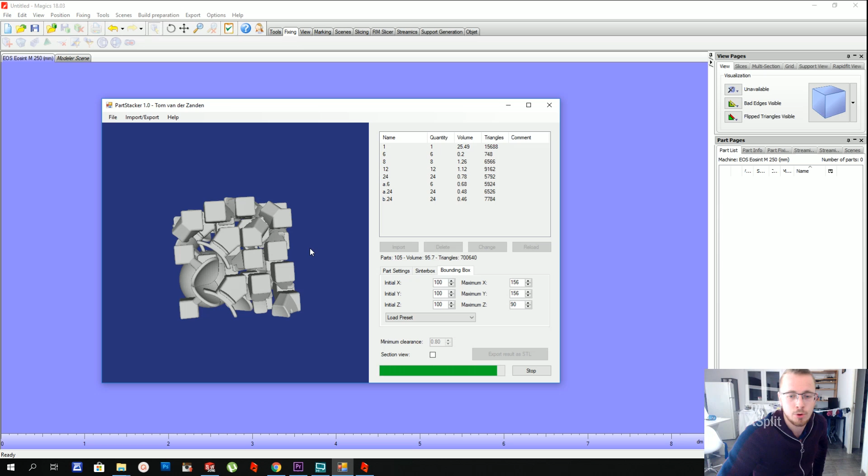Now, the minimum clearance between parts, I put 0.8, but that's just me. I don't generate a sinter box. I prefer generating it using Materialise, which I'm going to open as we speak. And the bounding box, let's just put like 80 millimeters and see if that's good enough.

This is quite random, actually. The bounding box is very arbitrary. You need to pick something that you know the parts will fit in, but you don't want it to be too big because it's going to stack them inside that bounding box. So if you have too few parts and too big a bounding box, it's only going to use part of the space and it's not going to optimize it into a perfect cube. So it's very important not to have a too big bounding box.

All right, so it's still meshing the parts right there, because each STL part is actually decomposed into a set of micro cubes, and it's going to use those to see if parts are intersecting, just to make sure that all the parts are separate inside the final STL assembly file. So that's actually very well optimized software. I think it was really well designed.

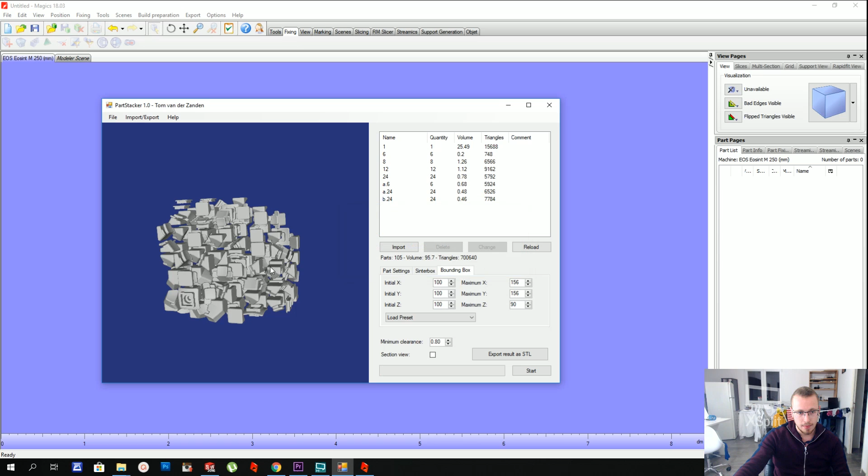It was made by Tom van der Zanden, which is the name of a very good puzzle designer as well. He created some pretty impressive designs. He was the inventor of the Curvy Copter. So yeah, he used to make a lot of designs. It was really great. So it's too bad he kind of stopped making those.

Okay, as you can see, the bounding box is a bit too big. You can recognize the cube here, the square, and the square on that side. So I'm going to stop right now, otherwise it's going to take too long to stack. I'm going to move it up to 100 on each axis, and I'm going to start again. And here I'm going to prepare my scene, which is a printer scene on Magics, and I'm going to use that to add a sinter box to the parts once they are fully stacked.

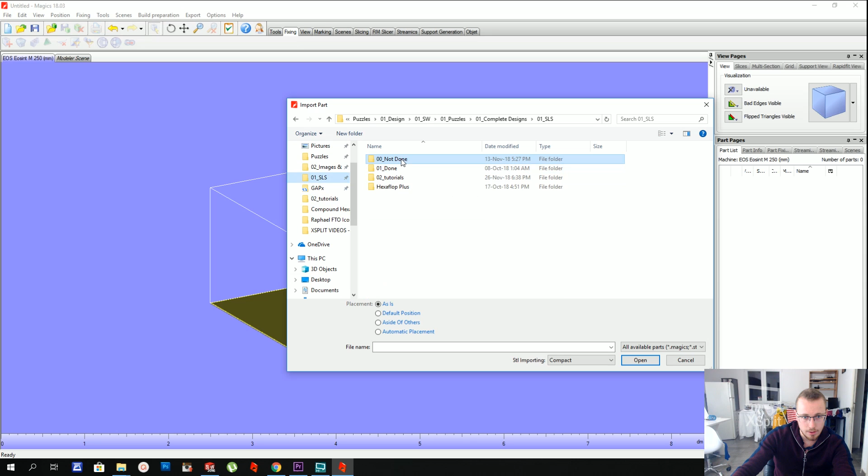So let's just see if the new parameters are a-okay for this stacking. Most of the time you have to try 3-4 times to get the size right in the part stacker, so it's kind of tedious. It's too bad that it doesn't calculate the bounding box size, but that would be a lot of work to code, so I'm not surprised it was made that way. Plus, it's already making us save a huge amount of time, so I'm just thrilled that it exists.

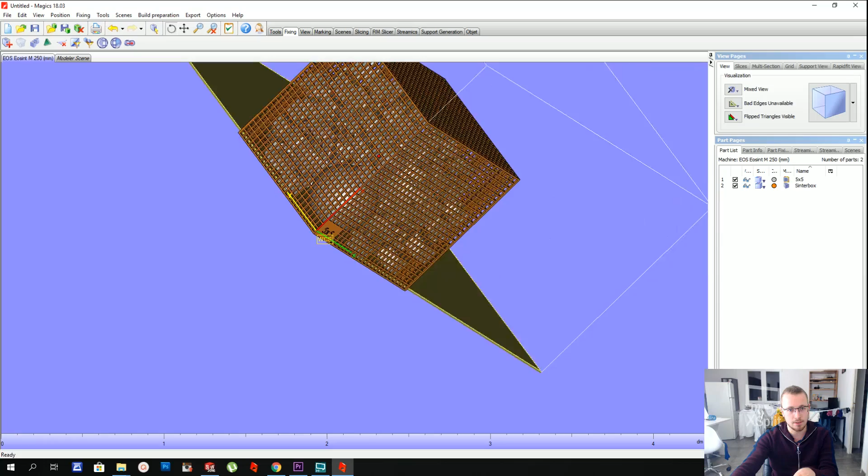So let's see. We're almost done. I think it's meshing the core right now because the core is so complex the way I designed it. But it's something we call in French un mal pour un bien, which means something negative for a positive outcome, because now it's stacking parts and it's not going to stack any in the core. Okay, as you can see, I made the bounding box too big, so now there's this whole section of parts missing. So the volume is not optimized at all.

Anyways, you have to try this a few times, and then once you see that it's cubic and well made, you can export the result as STL. I'm just going to do it now, even though it's not optimized at all, and call it 5x5. And now that that's done, I'm going to import that file. Where did I do it? Right, there it is. Tutorials, 5x5, and right there. And as you can see, clearly not optimized, but whatever.

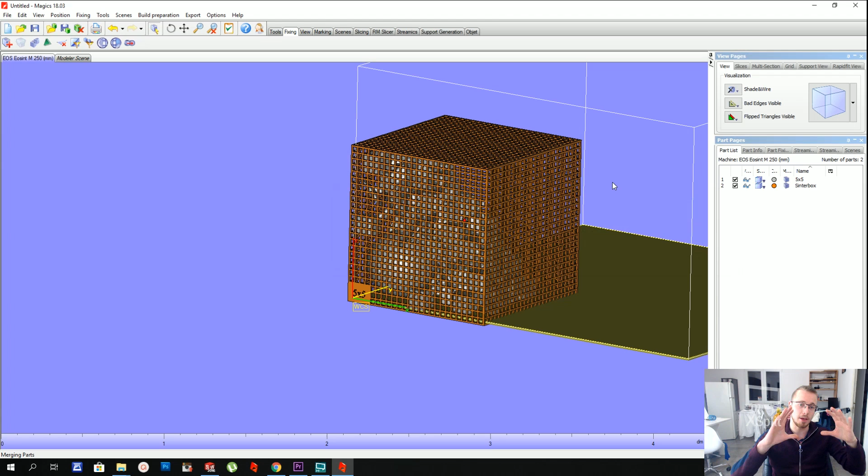Let's just do a sinterbox around it. I've already done that previously. I just wanted to show Part Stacker. I'm just gonna show you the sinterbox again. Let's call it 5x5 and finish. And I just want to show you why it's not optimized. As you can see here, it fits nicely inside a box, but there's that whole section of parts missing.

The reason why it's important to create a box on Part Stacker and optimize the size of the box for the parts to go in there nicely is because it's going to make printing cheaper, because most services calculate the price using the bounding box volume. So it's very nice to have software that can do it for you and make a nice cubic assembly of your parts. Alright, now that that's done, I can just save it as. I generally call it WSB, which means with sinterbox, and we're good.

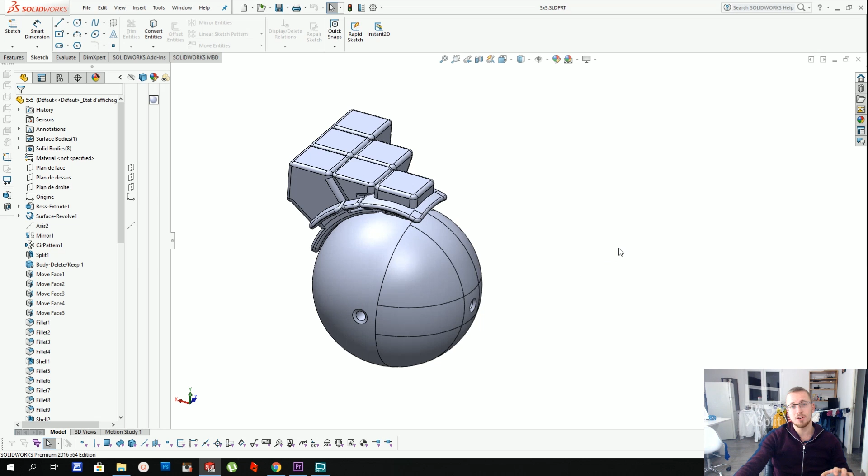So now I've finished my 5x5 design and it's ready to print, and I will make another tutorial for the stickers. So for now, I'm gonna leave it at that.